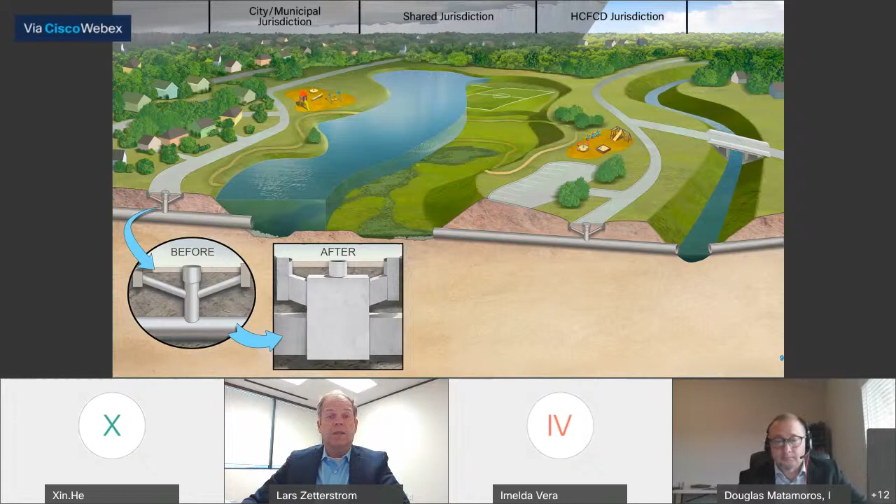On August 25th, 2018, Harris County voters approved $2.5 billion in bonds for flood risk reduction projects. This vote followed a series of meetings across Harris County in each watershed, which resulted in a list of what is now 181 bond projects. 160 of those 181 projects have been initiated so far, including all of the projects in the Halls Bayou watershed.

A total of more than $1.2 billion in partnership funding has been secured so far to stretch the 2018 bond program even further. The actual timing of each individual project will depend on a variety of factors, including environmental permitting, right-of-way acquisition, and utility relocation, and in some cases, requirements of a particular grant. That said, project lists and projected schedules are updated regularly on our website.

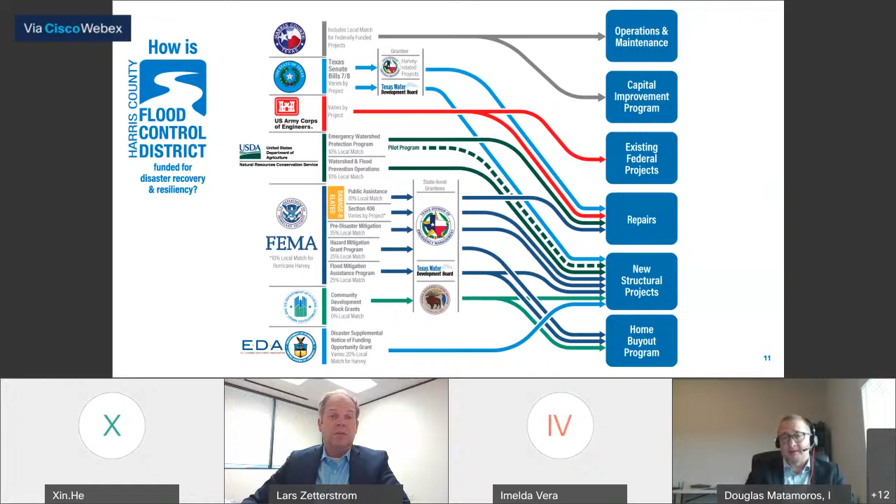While the bond was for $2.5 billion, the full cost of every project in the bond table is almost $5 billion. So we made it clear from the outset that we would need funding partners to fully construct the projects in the bond program. As I mentioned, we've had some success so far, having secured more than $1.2 billion in partner funding. This graphic illustrates the many sources of those partnerships, including federal, state, and local funding that the Flood Control District is working to secure for Harris County. Each agency has its own definition of eligible projects and its own requirements for local match funding, so the Flood Control District works diligently to match projects to the right partnership opportunities.

Before we get into the two projects we are here to discuss tonight, I want to provide an overview and an update of the Halls Implementation Program.

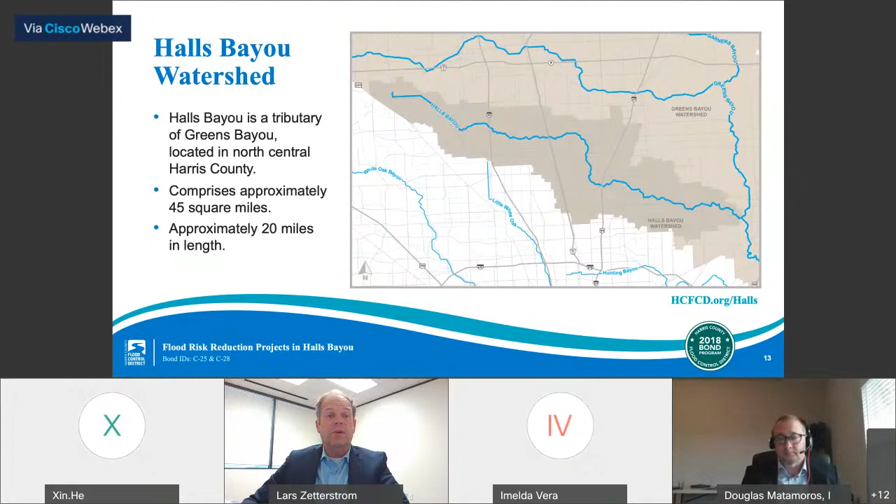Flooding is a persistent hazard throughout the watershed for residents, businesses, and property owners. Tropical Storm Allison in 2001 is the storm of record for the Halls Bayou watershed, flooding more than 13,000 homes. Then in 2017, Hurricane Harvey flooded an estimated 11,830 homes in the Halls Bayou watershed.

The Flood Control District is taking a watershed-wide approach to planning flood risk reduction projects in Halls Bayou. The Halls Implementation Program is a watershed-wide effort working to implement the 12 flood risk reduction projects identified in the 2018 bond program for Halls Bayou.

This watershed-wide approach provides a holistic view of activity in the watershed and enables the Flood Control District to deliver these flood risk reduction projects strategically and efficiently in this highly developed area. Projects primarily include construction of stormwater detention basins and channel conveyance improvements on the Halls Bayou tributaries and main stem.

While every flood risk reduction project is unique, they all have a common life cycle. Each project begins and ends with common and predictable milestones along the way. Whether a project moves forward from one stage to the next, and how quickly, depends on many factors, including the availability of funding, shifting community priorities, and other changing circumstances from year to year. The average life cycle of a project is between 3 and 5 years.

The life cycle starts with a feasibility study to determine if there is a good project to be built. That leads to a preliminary engineering report, and after that we can begin right-of-way acquisition, which can take 12 to 18 months alone. We also have to secure environmental permits, which can take another 12 months. We also work through utility relocations if needed, and then complete final design, finally moving into construction and ultimately maintaining the new infrastructure along with all the other flood control projects around the county.

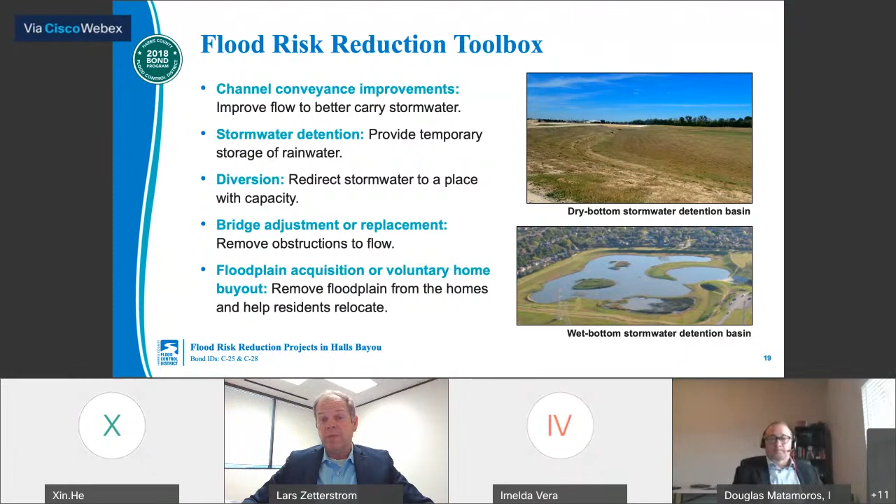A dry bottom stormwater detention basin will remain dry before a storm event, while a wet bottom stormwater detention basin has a permanent pool of water, which helps with aesthetics and water quality. These days, it is common to pair channel conveyance improvements in a channel with stormwater detention basins.

There are several other terms related to flood risk reduction solutions that we will use tonight. When we are evaluating a stormwater detention basin's benefits, we look at it in terms of acre feet.

An acre foot is a measure of volume equal to 1 foot of water spread over an acre, or as this graphic depicts, 325,851 gallons, or roughly a football field covered by 1 foot of water.

Additionally, sometimes we refer to tributaries by using their designated flood control unit number, such as tributary P118-21-00, or you may simply refer to them as the project channels. Channels provide the pathway for water to move through the watershed.

Channels may be something as small as a ditch or as large as Halls Bayou itself. We will also discuss culverts or box culverts tonight as part of the project solutions. Culverts are pipes that carry water from the neighborhood under the road and into a channel.

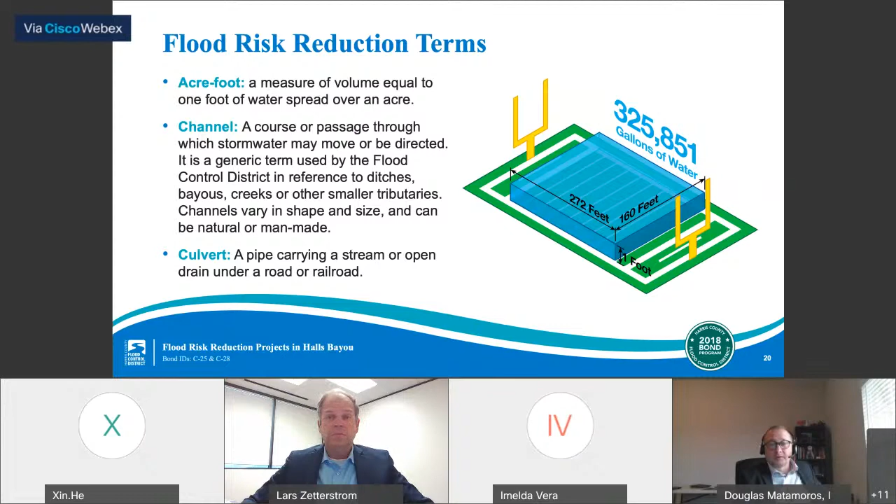The final two flood risk reduction terms we want to review are related to the two types of stormwater detention. First, we have an inline stormwater detention basin. This is when stormwater is stored within the channel itself by expanding the size of the channel and/or by elevating the water surface using a control structure.

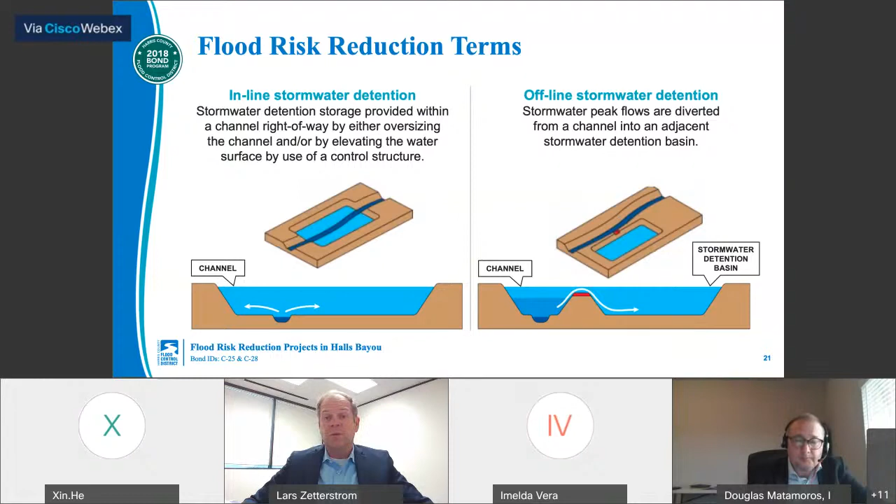The second type is an offline stormwater detention basin. This is when we divert stormwater from a channel into a nearby stormwater detention basin for storage until the threat of flooding has passed.

Moving into our two projects, the first one we will discuss is bond project C-25, which will make channel conveyance improvements on tributary P118-21-00 and construct a stormwater detention basin.

This project is located just north of Halls Bayou in the Isom Street area between Crispin Road and Aldine Westfield Road. As you can see here on the map, the stormwater detention basin will be situated between Isom Road and Halls Bayou, running along Crispin Road.

The construction of the new open channel is located north of the stormwater detention basin site, between Isom Road and Aldine Mail Route Road. An underground culvert will run north of the open channel, first along Aldine Mail Route Road, and then towards the Western Home subdivision near Debony Drive.

This stormwater detention basin and channel conveyance improvements on tributary P118-21-00 will work in conjunction with two Harris County Engineering Department proposed projects: the Western Home Subdivision Drainage Improvements Project and the roadway and drainage improvement projects along Aldine Mail Route Road.

For those of you following along with the PDF via phone, we are moving to slide 23 of tonight's presentation.

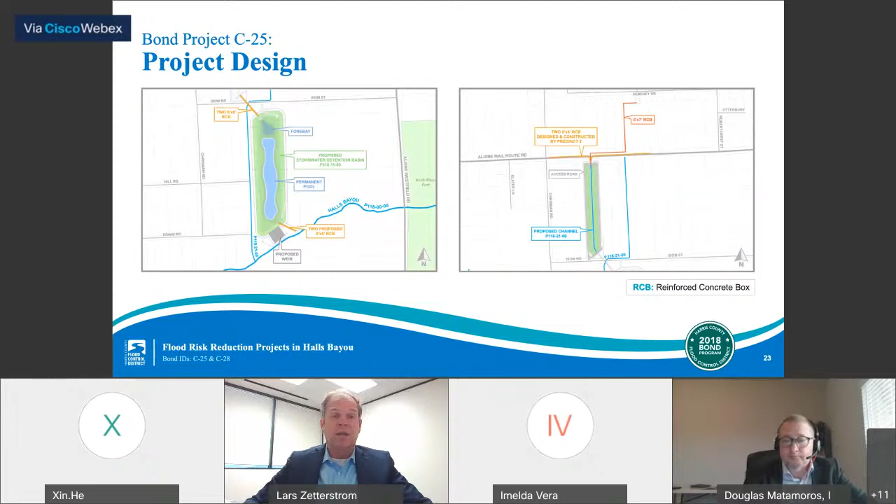It is important for us to note that this flood control district project lays the groundwork to allow for additional flood risk reduction benefits to be realized in this area through the Harris County Engineering Department's projects. Those two drainage improvement projects would not be possible to construct without flooding another area if the channel conveyance improvements and stormwater detention basin were not constructed first to handle the increased flows from those two projects.

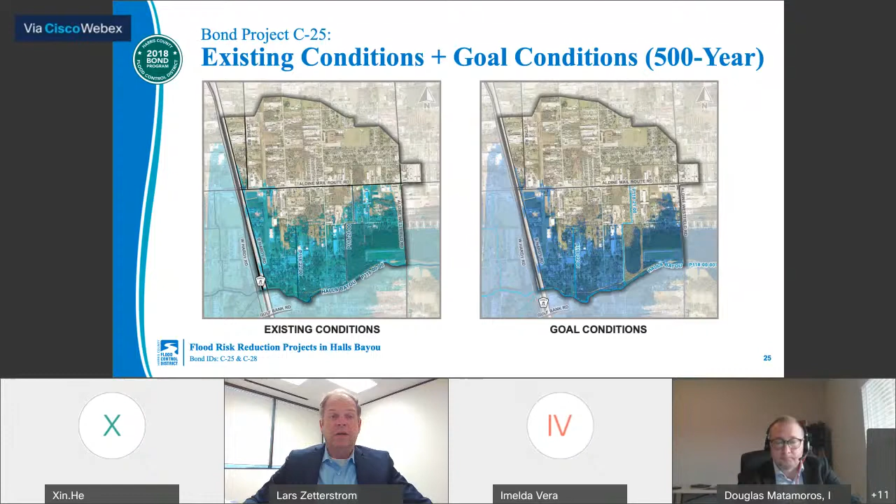Looking towards our next steps, we expect construction on the stormwater detention basin to begin this summer and take about a year to complete. The channel conveyance improvements part of the project is expected to begin construction in late summer or early fall and be completed around the same time as the stormwater detention basin, in the spring or summer of 2022.

Since we have been discussing two area Harris County Engineering Department projects, I want to provide a little more detail on both of these projects before we discuss our second project for the evening. The Western Homes Subdivision Drainage Improvements Project will provide improvements to the neighborhood drainage system. The project team is currently evaluating final options and considering improvements to the roadside ditches, driveway culverts, and additional culverts.

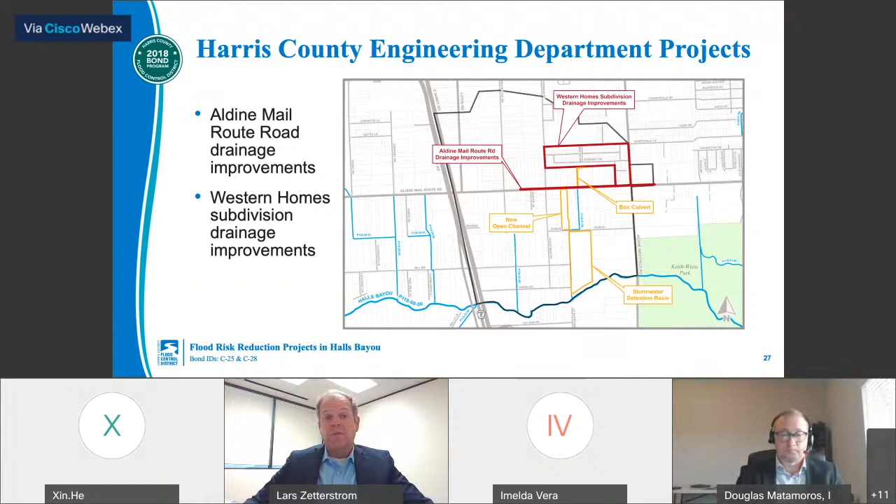The Aldine Mail Route Road project consists of paving and storm sewer improvements from Slater Lane to Aldine Westfield Road. The Flood Control District project will provide necessary channel and stormwater detention capacity to receive waters for these projects and prevent downstream flooding that could otherwise occur from these two drainage improvement projects.

For those of you following along with the PDF via phone, we are moving to slide 28 of tonight's presentation.

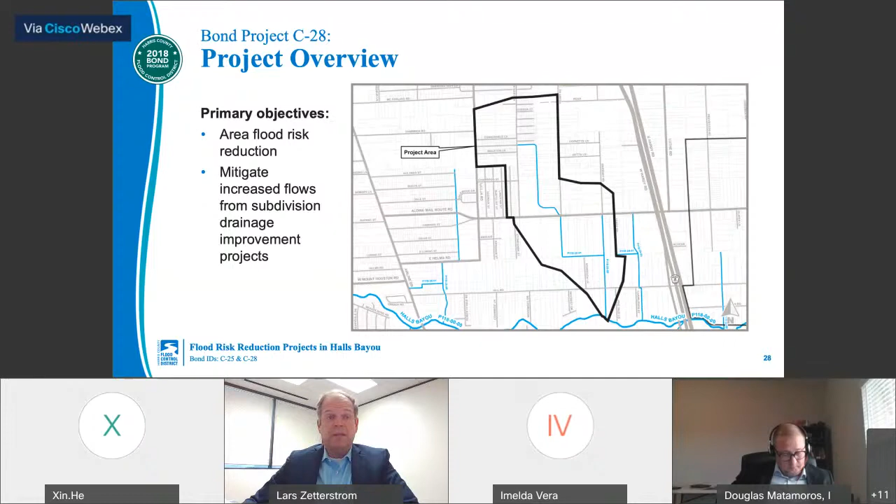With the preliminary engineering stage still underway, we do not expect it to hit the construction stage for another 2 years.

When the project first kicked off in 2019, a broad project community engagement meeting was held at the Hardy Senior Center to discuss why this area floods and the goals of the feasibility study. At that time, we knew that there is limited capacity for stormwater in the existing channels and that neighboring channels overflow into tributary P118-25-00 during larger storm events, which makes the area flooding situation worse at times.

Now, tonight we want to report on our findings from that feasibility study, including the sources of the flooding and the results of our alternatives analysis, which evaluated potential flood risk reduction solutions for this area.

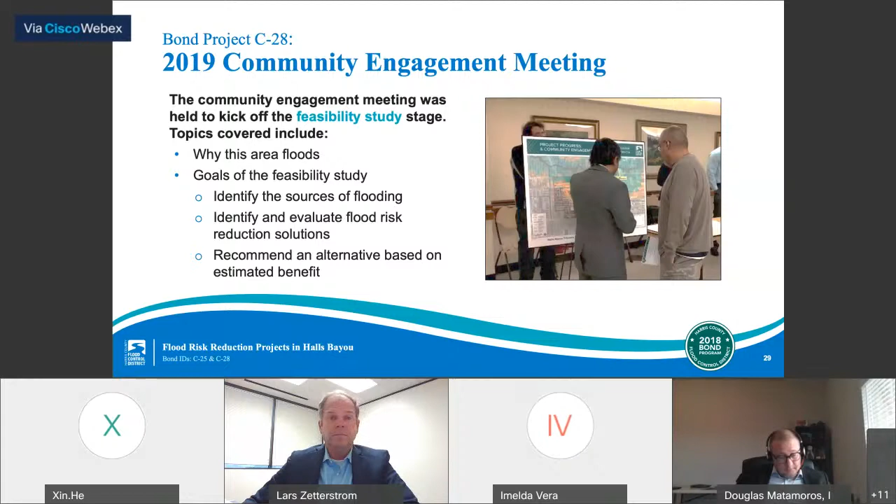Overflows from the Halls Bayou main stem will still impact this area. We will show this overall impact after looking at the 500-year storm in this area.

For the 500-year storm event, the existing conditions shown on the left are even greater than what we saw for the 100-year storm event. Our study found the reasons for flooding during the 500-year storm event to be the same as those for the 100-year storm event: inadequate channel capacity and length, overflows from the Halls Bayou main stem and adjacent channels, as well as limited local drainage system capacity.

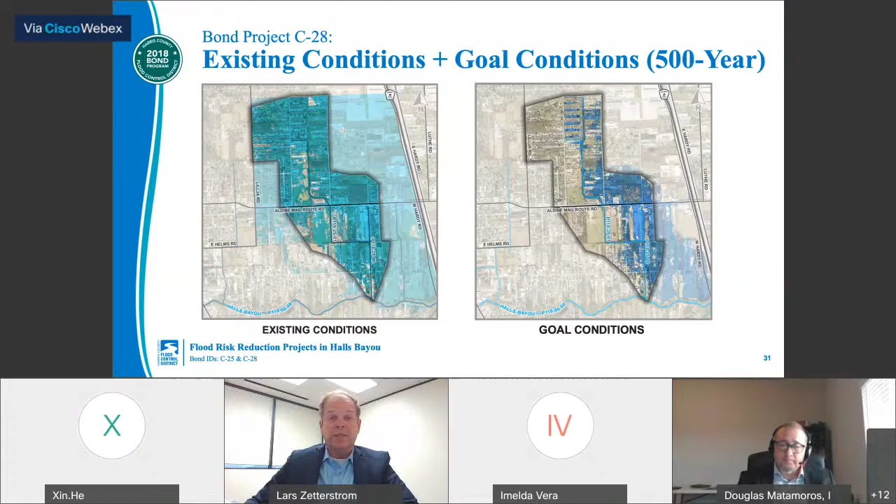As I just noted, this project aims to reduce the inundation areas for the Halls Bayou tributaries P118-25-00 and P118-25-01.

The Flood Control District is evaluating improvements to Halls Bayou itself to improve these conditions to the overall FEMA effective floodplain. A complete solution to flooding in this area requires improvements to both the tributaries inundation areas through projects like Bond Project C-28 that we just discussed, and to improve overall FEMA effective floodplain through improvements to the Halls Bayou main stem, along with subdivision drainage improvements.

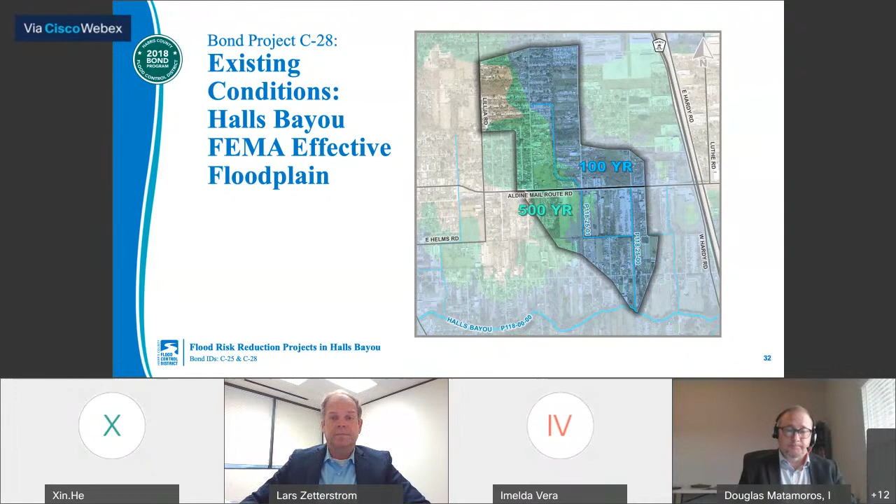Therefore, to figure out how to achieve our goal conditions for the tributaries inundation areas, we looked into our flood risk reduction toolbox and began pulling together several alternatives for evaluation.

The alternatives considered included making channel conveyance improvements to the two channels, P118-25-00 and P118-25-01, in both the existing flood control district right-of-way and with additional right-of-way. The potential channel conveyance improvement solutions included widening, deepening, and extending the channel. We also considered the construction of a stormwater detention basin.

We evaluated differing sizes, configurations, and locations for the stormwater detention basin. Combinations of the various channel conveyance improvements and stormwater detention basin alternatives were also evaluated as part of the alternatives analysis.

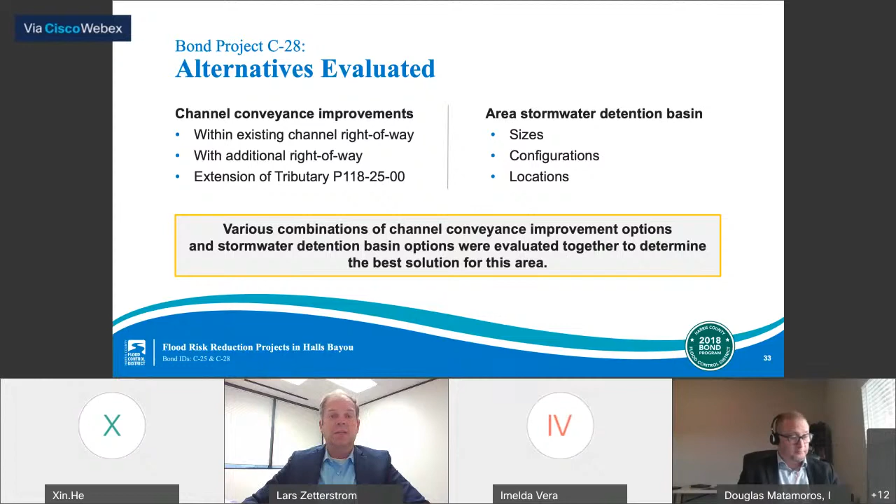The selected recommended alternative will make channel conveyance improvements on tributaries P118-25-00 and P118-25-01, including lengthening tributary P118-25-00, and will construct a stormwater detention basin with a capacity to hold approximately 33 acre-feet, or almost 10.8 million gallons of stormwater. The recommended alternative is anticipated to provide a 100-year level of service to the area.

In existing conditions, overflows come from adjacent channels. The Flood Control District is also planning improvements to the adjacent channel, tributary P118-26 and Bond Project Z-01, which will reduce its overflow into the P118-25-00 and P118-25-01 channels. Those improvements are expected to help provide greater flood risk reduction for this area, further improving the anticipated level of service from a 100-year storm event to a 500-year storm event.

As we mentioned before, we do not know the exact location of the stormwater detention basin yet. That will be determined during the upcoming design stage.

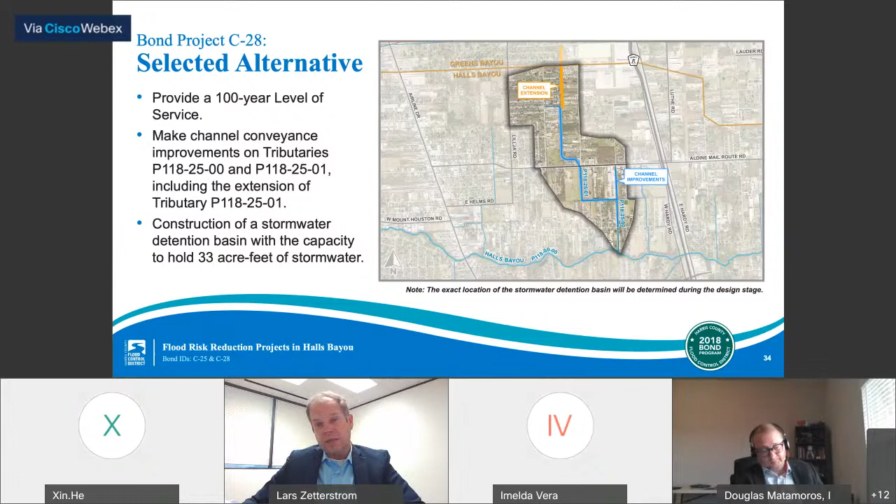Looking towards the next steps, this project is currently in the preliminary engineering stage, where the selected alternative will be further evaluated and the design criteria will be finalized. We expect this stage to be completed this fall.

The project will then proceed to final design, and the design stage is anticipated to be completed approximately 1 year later. At this time, we expect construction to begin in the spring of 2023 and to take approximately a year to complete.

And finally, just like Bond Project C-25, we are designing this project to work hand in hand with 2 adjacent subdivision drainage improvement projects that will be constructed by the Harris County Engineering Department. These 2 projects will be in the Aldine Village and Oak Glen Place subdivisions.

So to provide a little bit of additional information on the 2 Harris County Engineering Department's proposed subdivision drainage improvement projects, the Aldine Village subdivision drainage project will make storm sewer improvements in 2 locations.

On the east along Sellers Road from Ridgeland Court to Corvette Court, and on the west along Leisure Road from Connorvale Lane running south past Walton Lane, where it connects the proposed drainage improvements in the Oak Glen Place subdivision. The Oak Glen Place subdivision drainage improvement project includes improvements to neighboring roadside ditches and storm sewers, as well as the construction of a stormwater detention basin.

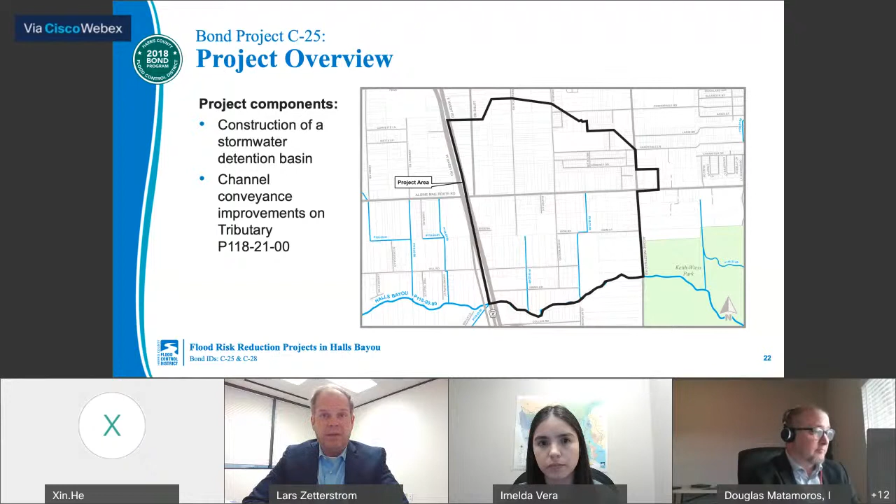Sure. I'll just go ahead and note that when flood control does evaluate projects, they look at things like the level of service that can be provided, impacts to property owners, the number of residents that would need to be relocated due to right-of-way acquisition, and overall project costs. And sometimes those are competing things with each other, but flood control does try to balance those and then rank them to develop a recommended alternative. And in this case, the configuration we presented tonight was the recommended alternative from that report.

Thank you both. Following up to that, the second part of this question is why was alternative A chosen over alternative B? Yes, so as I just referenced, the projects are ranked given the various criteria, and alternative A ranked higher than alternative B.

Thank you. We have a Spanish question coming in from Emilia. Emilia asks: this evening, are there more projects planned for our area?

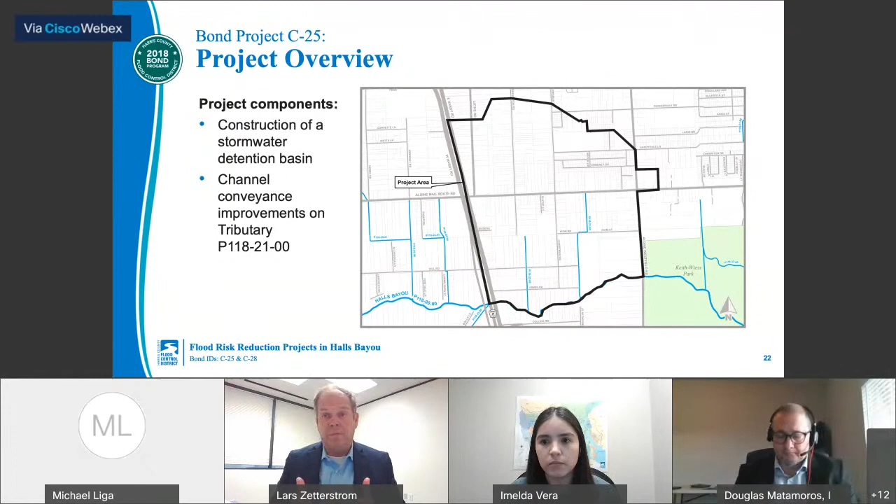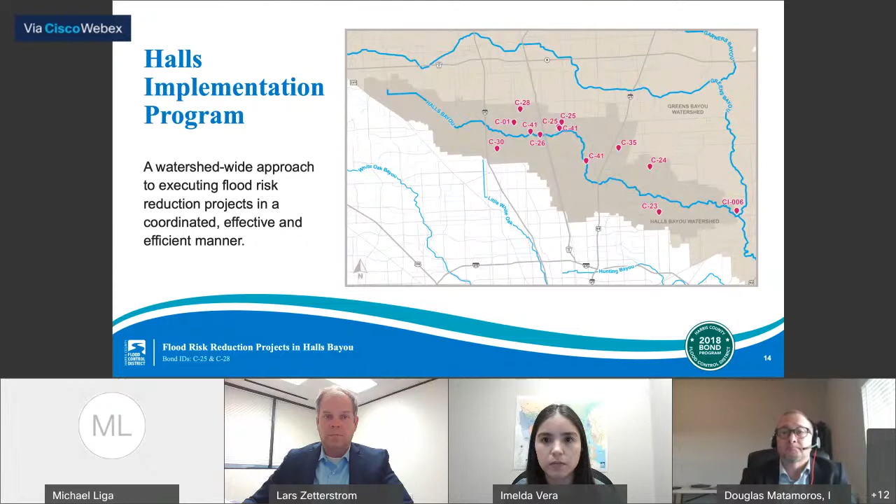The C-25 project is anticipated to start construction in summer of this year and is anticipated to be completed by 2022. There will be temporary lane closures on Eltham Street and Aldine Mail Route Road during construction, and we will also post the traffic control plan on our project's website before construction.

Thank you, Xin. Next question is for Lars or Michael. Are any walking trails planned for this project?

Go ahead, Mike. Sure, there are currently no plans to construct any walking trails or recreational amenities in relation with these projects. But the Flood Control District does look to partner with other agencies to include amenities where possible, and we will continue to have those discussions and be open to those opportunities.

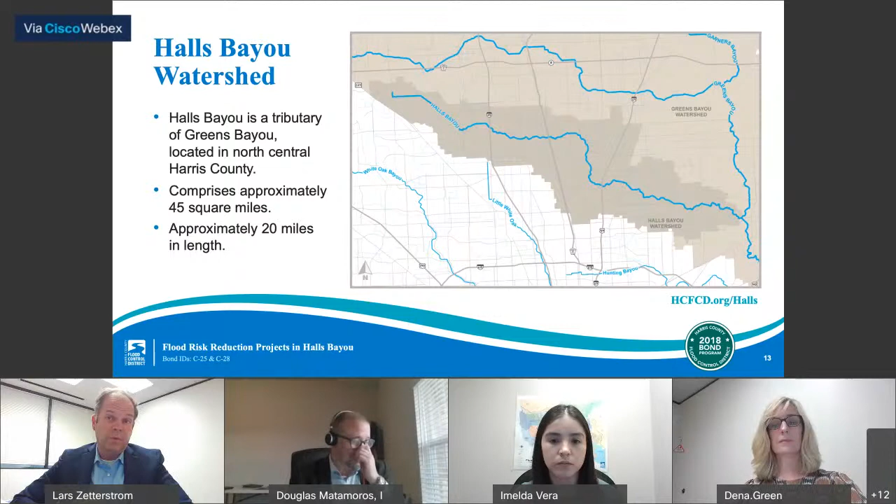For the two projects that were presented this evening, construction will last approximately one year for both. For other projects, it really varies on the size and scope of those projects, as well as obtaining the necessary partner funds to fund the construction of the projects that have funding from the bond program to carry them to completion of final design, but currently are seeking the additional partner funds to construct them.

Thank you. A question coming in for Greg. Greg, how does the new development fit into this? And can the Harris County Flood Control District restrict development in my area?

The HCFCD projects referenced here are not new developments. It's specifically related to mitigating the flooding due to drainage improvements. So it does not tie into any new developments. I do not have information on restricting development, but we can look into that and get back to you.

Thank you. I'd like to add to that, if you don't mind, real quick, Imelda.

Yes, and I would like to point out, which was mentioned earlier, that Harris County is a no adverse impact community, and there are criteria in place so that if new developments are constructed, they are required to mitigate changes in drainage. That means they're required to put in that extra storage or detention or appropriate mitigation measures so that they aren't changing drainage in a way that's going to cause an impact on others upstream or downstream of them in the watershed or along those channel systems. So while we may not be aware of an immediate new development in this area, I wanted to point out that there are those criteria and guidelines in place to ensure that as new development goes in, they are required to adhere to those guidelines so that they are mitigating any impacts on drainage.